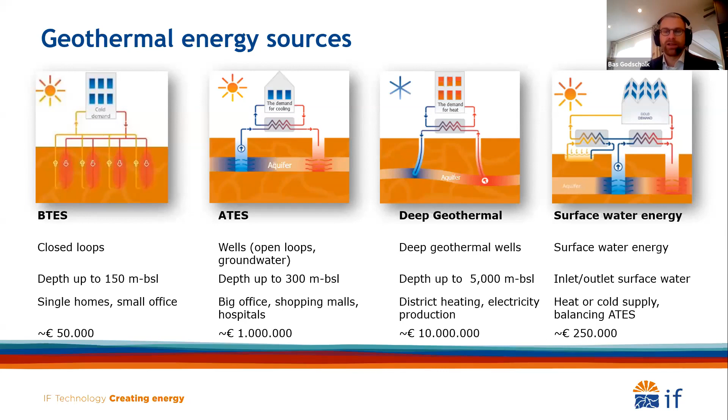Let me go a little bit more into detail on aquifer thermal energy storage systems. I think the most important is that you really store the seasonal heat and the seasonal cold in your subsurface. By storing this energy, you can reuse the heat from the summer during the winter time. And during the summer, you can cool your buildings directly with the cold water which has been stored in your aquifer. Important is that we only have a very small temperature difference in the aquifer.

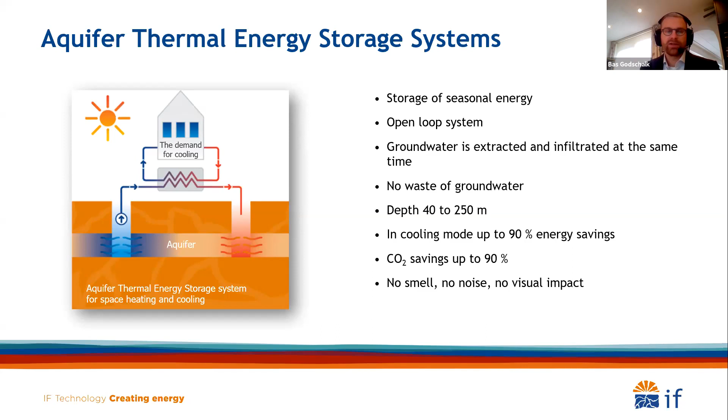The normal temperature is about 12 degrees in the Netherlands. So our cold well will become about 7 degrees and our warm well about 17 degrees. This results in a very low impact on the chemistry, physics and microbiology in the subsurface. Another very important point is that there is no depletion of groundwater. The amount you abstract is exactly the same as you inject. That is a very big advantage when you also want to protect and take care of your groundwater resources. And of course, your energy delivery is very efficient, so your COP is very high.

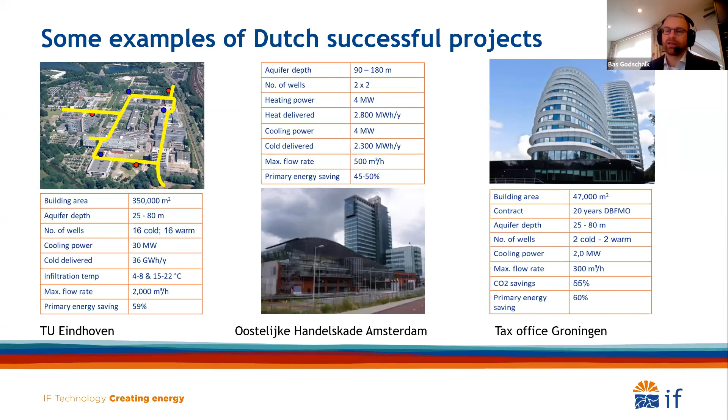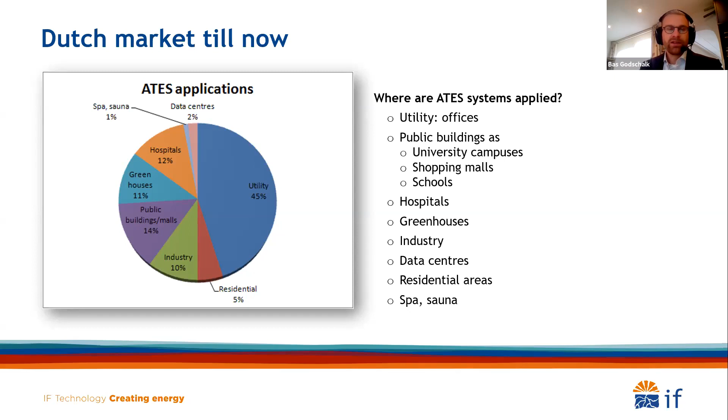When we look where ATES projects are realized, more or less half of them are commercial buildings like offices, and the others are hospitals, greenhouses, public buildings, and also industry. A smaller part is residential, but that will change, and I will tell later about that trend. In the Netherlands in 1990, there were only a couple of systems, but over the years the number of systems has expanded, and at the moment we are counting around 3,080 systems.

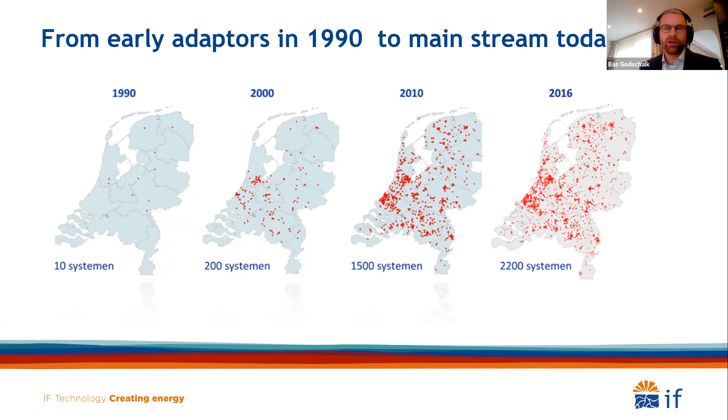Worldwide, we see that in Sweden there are many systems in the southern part, some in Belgium, also in the UK, where we also worked in London and Birmingham, some in Germany and other countries, but not very high numbers, especially for bigger systems. In many countries, you have some groundwater abstraction with small wells and heat pumps, but not the big applications.

Why is it a success in the Netherlands, and why could it become a success in Ireland, in Northern Ireland? I will go into a few details. One of the critical issues is, of course, you need an aquifer because you need to abstract and inject the groundwater. We have very proper aquifers, which means that nearly everywhere in the Netherlands you could apply this technology. That makes it very attractive for project developers to start a project, because they more or less know that they can apply it.

And we have also a very good database which is freely accessible at DINO, and you can have a very accurate idea of how the layers are built up, which means that you can save on the initial cost like doing a test drilling. And this is very important because then you can move on quickly.

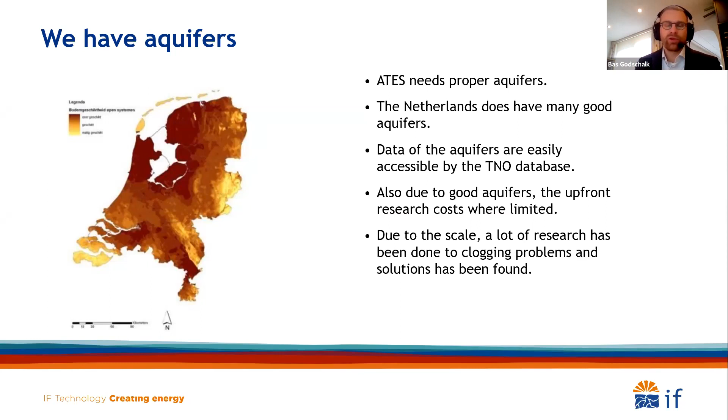But it's also very important that you have a good climate, because you use the seasonal heat and the seasonal cold to store it and you reuse it in the next season. And we have seen that especially cooling is very efficient, with COPs between 30 to 40, which means that you can have a very attractive and good business case.

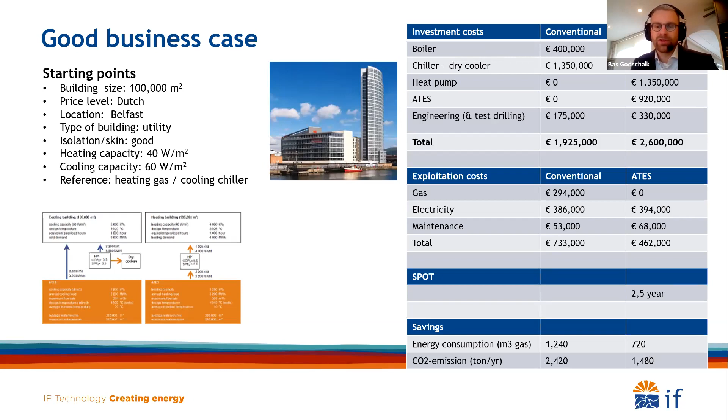Of course, it depends on the starting points and assumptions you make, but it's quite a normal number in the Netherlands that your return on investment will be between 2 to 7 years. So you also see in the last part that you can have serious CO2 savings by using ATES.

What's also very important is that we have a proper legal framework, because you see in countries where there's a lack of a good framework that project developers are not willing to invest, because they're quite unsure if they can run their system for many years. And that's why it's very important that you work on a very good, reliable framework where it is clear what you have to submit to get your permit, and that you also have a clear demand of what you should measure during the time. And don't ask too much, because then the exploitation cost will become very expensive.

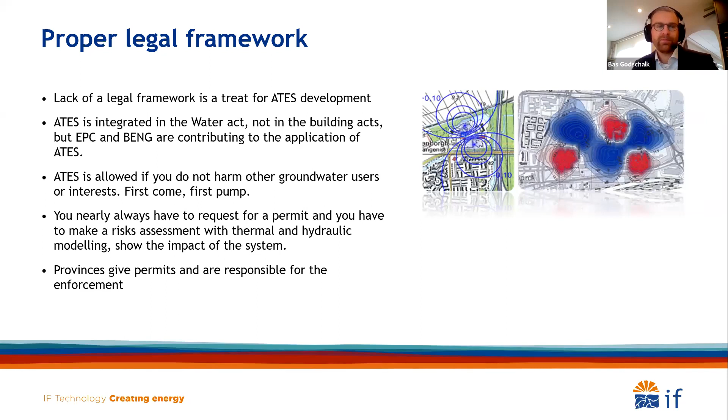What's also very important is that you know that there are different interests which you should bring together. So one department wants to save energy, the other department wants to protect the groundwater, and the project developer wants to earn money by developing good and green buildings. So you have to bring these different interests together and put the point on the horizon where you want to go, and then think how you can combine these interests to have a good legal framework.

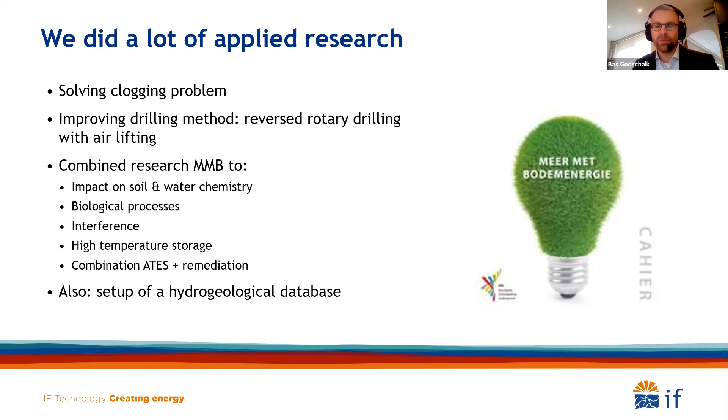As mentioned, the return on investment is quite interesting. In the Netherlands, there's no subsidy for ATES systems, but the government supported the technology by investing in research. So we solved in the beginning the clogging problems. We improved the drilling methods, because it's very important to have a reliable well. And after a couple of years, we did a very large research to measure all the impact on the chemistry, on the physics, biological processes, etc., which is summarized in the Meer met Bodemenergie brochure.

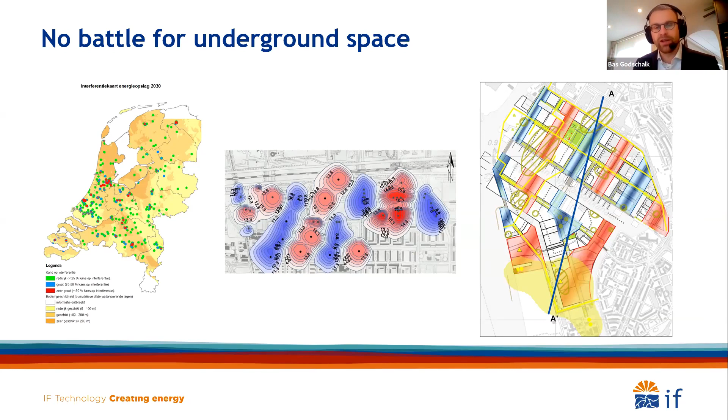In some countries, some cities, we see that there are so many ATES projects that the underground becomes a little bit crowded. So some cities start to plan the ATES systems, because they think that will be better to get more systems realized, and that they won't compete with each other, but contribute to each other by making cold zones and warm zones.

Another trend in the Netherlands is that the residential areas are becoming more and more important for the ATES business, because the authorities have decided that we stop heating houses by using gas. So all the project developers have to find new solutions. A new solution could be that we use ATES; although the business case is more profitable for cooling, you combine it and also use it for heating. And we see that it will often also be combined using surface water as an energy source. So that is the most important.

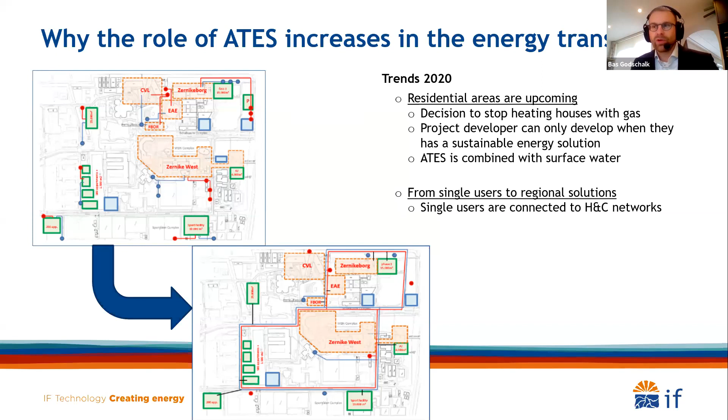So I really hope that, of course, it all has to do with game changers. Entrepreneurs who really want to do, people who are very curious to do research, etc. So I think if we can work together, and we are open for sharing information, for giving trainings, or showing you Dutch projects, you are welcome to come to the Netherlands once the coronavirus has gone back a little bit. So I hope that we can collaborate in the future.